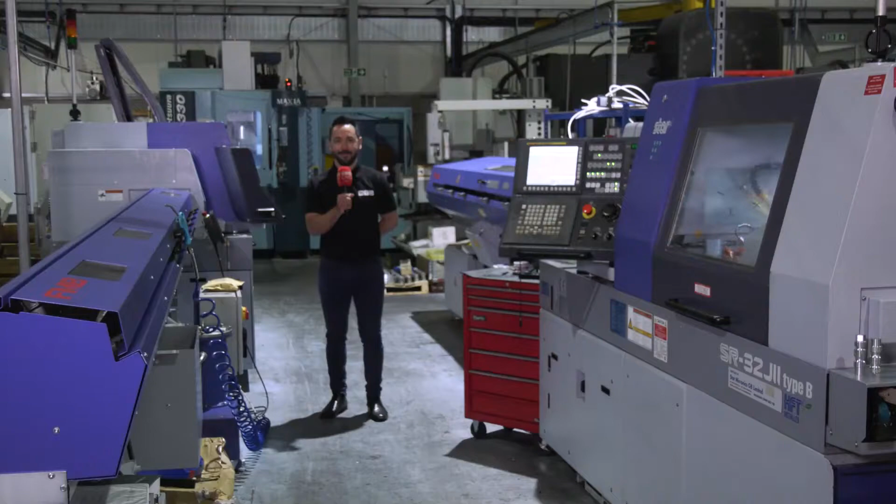SolidCAM UK supply the CAD/CAM packages for all of these multitasking machines at Oracle Precision, but today we're specifically looking at how they drive the sliding head machine tools. MTD CNC have travelled to Oracle Precision today with SolidCAM.

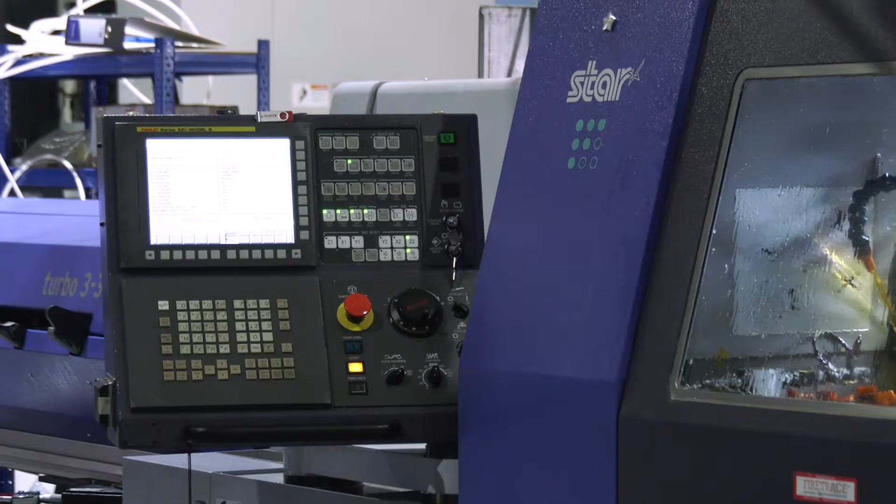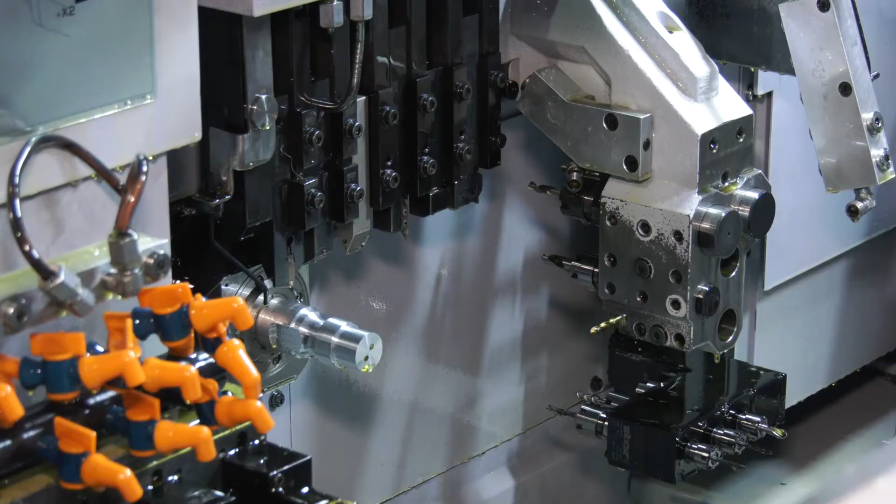Now, Ben, you've supplied the CAM package for this Star machine, but in fact all of the machines within Oracle. Why have they gone for SolidCAM and what advantages are they getting? Yeah, so Oracle's been a SolidCAM customer for quite a few years now. We've supplied obviously the milling and the turning side, 5-axis simultaneous, and now we've just recently supplied the sliding head capabilities. So Oracle have chosen to come with us because they're an existing user.

So for an existing user of SolidCAM, to move up to sliding head capabilities, it's a very short learning curve. Everything's the same, it's just turning, it's just milling. All we're adding on is the channel synchronization and obviously the simulation of the machine tool as well.

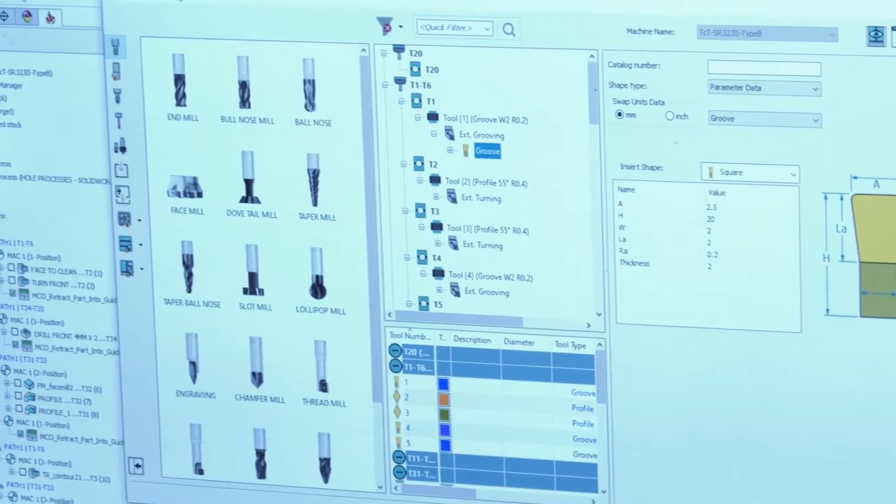So what advantages are they getting, Ben, apart from just the simplification of programming? So being able to program the components offline, also you've got the full simulation showing any collisions. Anything in there that might not look right is seen while the machine's still out here running. So it's still making parts out here, programming parts in front of yourself. Everything's done offline, and we can tweak things, change things as much as you like until it's ready to go on the machine.

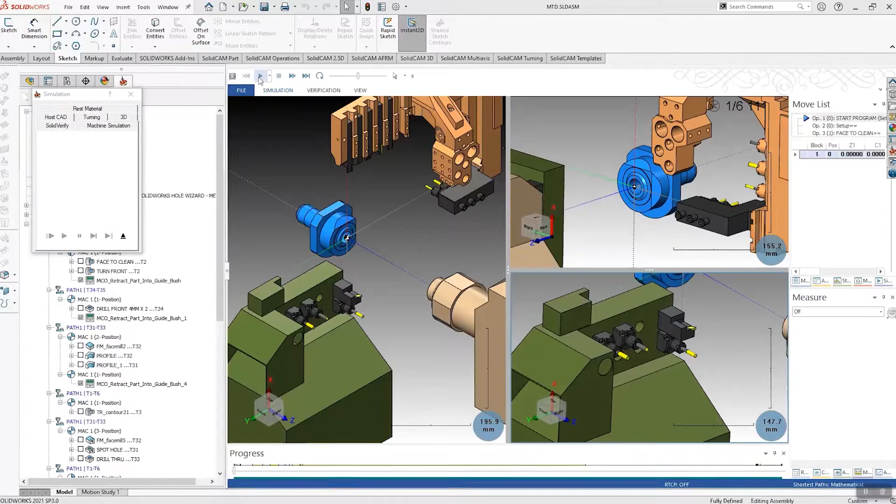And how have the guys at Oracle taken to the programming of the Star with SolidCAM? Well, quite easily. I think we've given them a couple of days training for the sliding head. Like I said, they're already using SolidCAM, so everything's already familiar to them. The same profiling operation is used in milling, turning and on the sliding heads. So all we're doing there is just upskilling them to the visual bit of the synchronization.

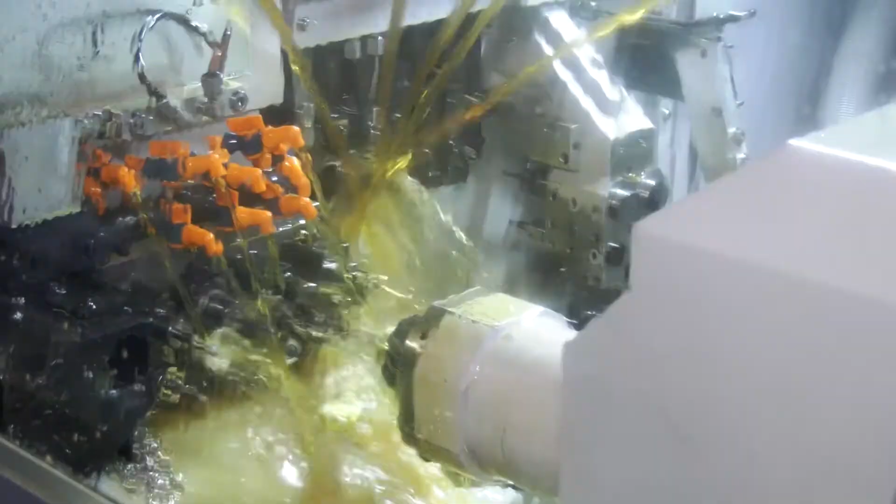So obviously we can support these machines. They've got quite a few axes on these machines. There's a lot going on. We can support sliding heads with unlimited number of axes, unlimited number of channels, unlimited number of axis patterns. We can even do the channels by turret, or we can do the channels by spindle as well.

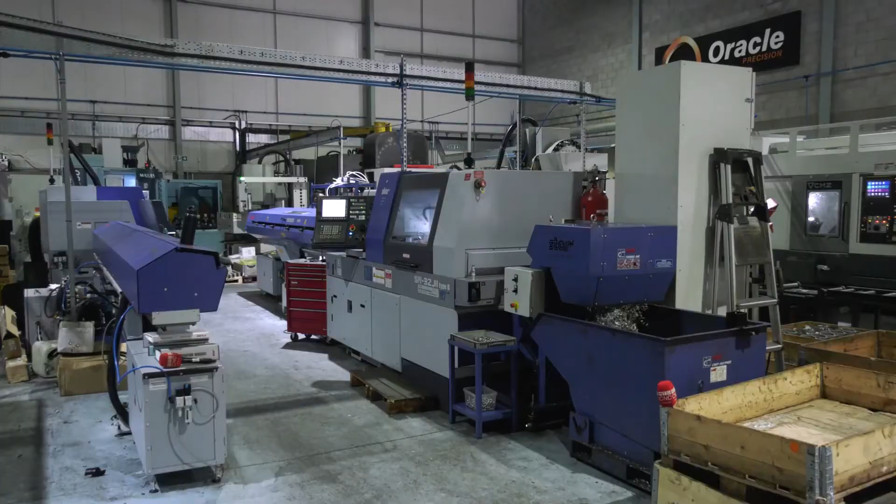Can you tell our audience a little bit more about the synchronization? Yeah, so channel synchronization inside SolidCAM, we can have the front spindle and back spindle working at the same time. We can have different banks of tools working at the same time. We can do balanced turning and things like that. And what you see is you just program the job naturally as you would with any job.

And then when you get towards the end of the job, you go into the channel synchronization window and we can move all those different operations around. We can have operations working with other operations at the same time. SolidCAM will tell you if those operations can't work at the same time. You can see all your different synchronization points as well.

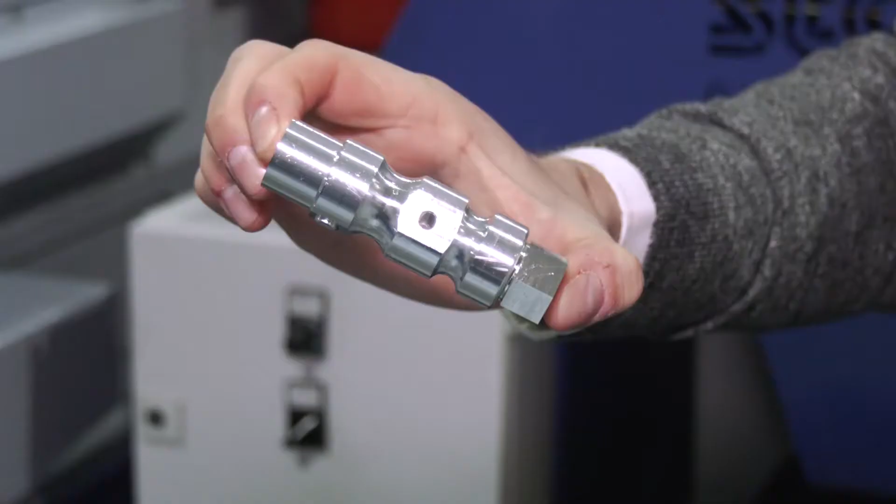Sean, the owner of the company, had told me that he's actually achieving stuff now that he couldn't previously achieve without SolidCAM. So how has it made such a difference to be able to manufacture parts that were currently unmanufacturable? Yeah, so the component that we've got on there now is a prime example. Nathan, the programmer, he designed that part last night, and programmed it, got it set, and it's all running now this morning. So that's how quickly and easily it can be done.

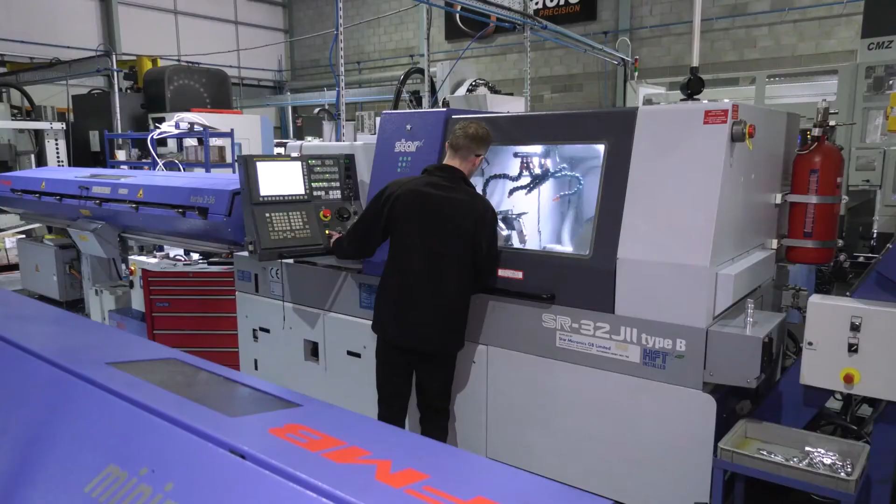There's a feature on there, a little bit of milling on the side that Nathan said he would have never been able to program without CAM. He wouldn't have stood there at the machine and tried to program that at all. So they're bringing in components now that they wouldn't otherwise have been able to do. Now they can quite quickly create a program, get the machine set up, and it's running. So rather than days of programming or a day at the duck board, it took Nathan a couple of hours in SolidCAM and we've got a component out and done.

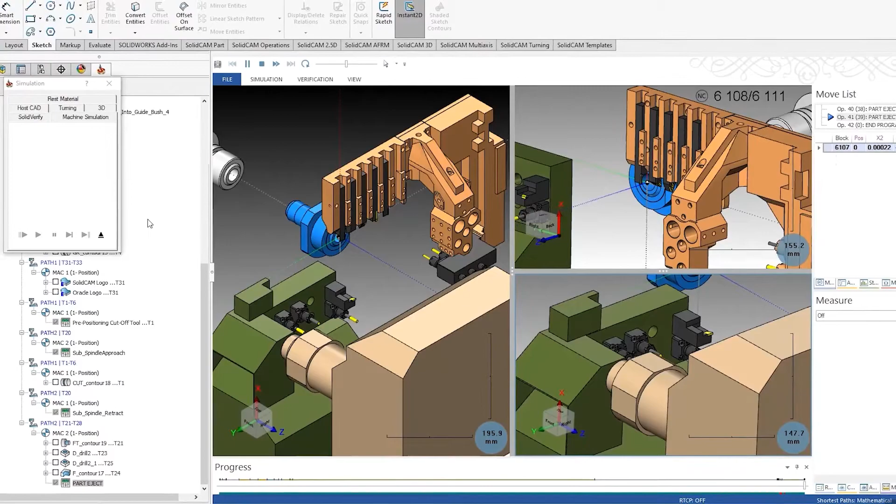It's not only saving time in regards to programming, simplifying programming, but what about the productivity? Are you reducing cycle times? Yeah, so we're reducing cycle times as well because you're able to do all the synchronization and make the different channels work at the same time. If you stood at the duck board, yes, you could do that, you could work that out.

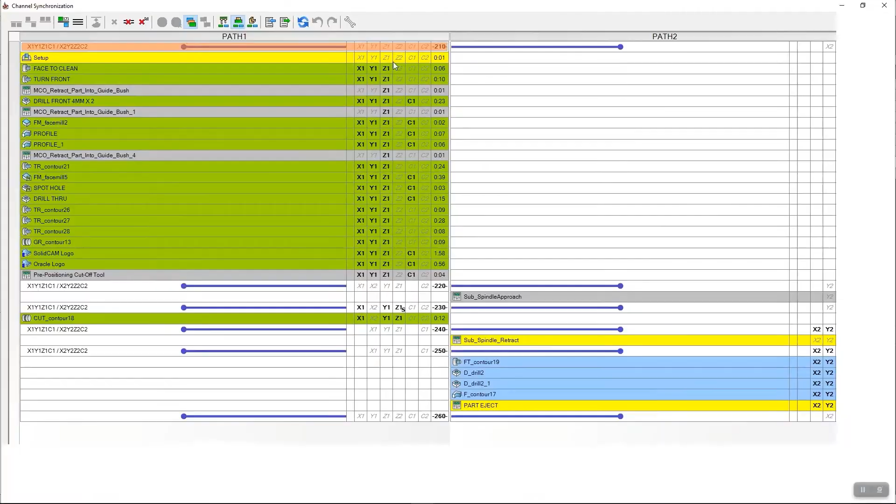Might take you a bit longer, but you can try things in SolidCAM as well. So you could try one way, see how fast that is, then change it. You can save that synchronization, change it to something else, and if you're not happy with it, go back to the original synchronization pattern. Ben, thank you very much.

It's been an absolute pleasure. So there you have it. SolidCAM at Oracle has been an absolute game changer.